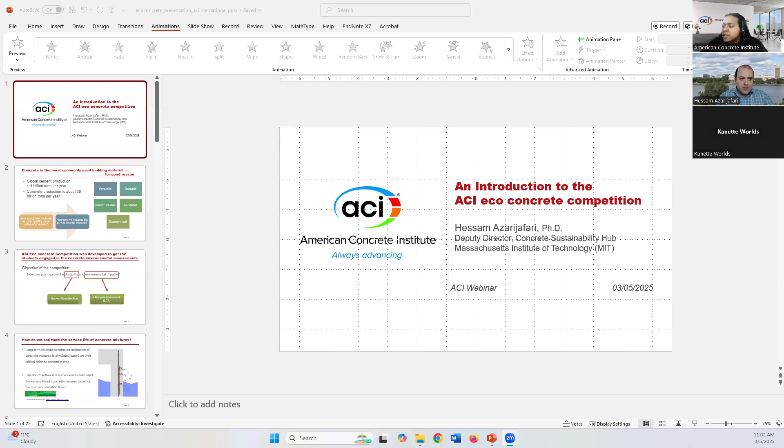All right. Hello, everyone. Thank you very much for joining this webinar. My name is Hessam Azarijafari, and I'm working as Deputy Director of the MIT Concrete Sustainability Hub. Today, I'm here to give you an introduction to the Eco Concrete competition and some of the changes compared to the previous version of the competition that was held in 2021.

To start this presentation, I would like to bring the importance of concrete and cement to your attention, which is the most commonly used building material for various reasons. As you can see on the screen, we're using more than 4 billion tons of cement per year, and obviously a much larger amount of concrete because cement is only one constituent of the concrete, so 30 billion tons of

concrete, and it's all because of the versatility, durability, constructability, and more importantly, concrete is a democratic material available everywhere around the world. So the availability and the economics of cement and concrete have enabled us to build a lot of durable infrastructure and buildings to satisfy the requirements for population growth and residents around the globe.

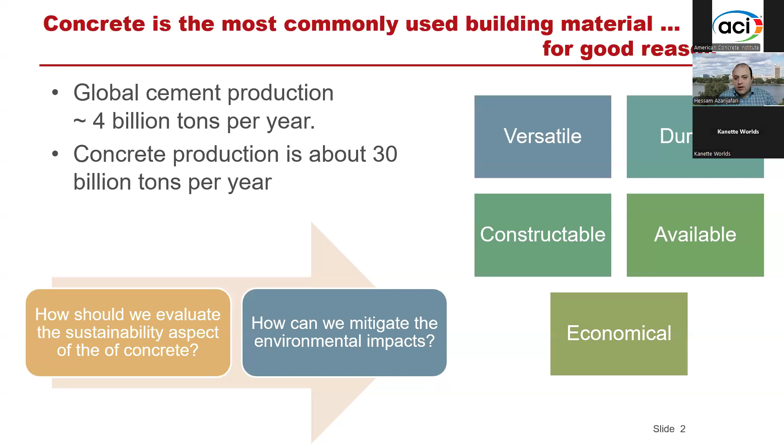So this huge amount of cement and concrete use should make us think how we can evaluate the sustainability aspects of concrete and what measures we can include in order to mitigate the environmental impacts of concrete. In this sense, we developed the ACI Eco Concrete competition in 2017 to get the new generation of civil engineers and students engaged in concrete environmental assessments.

So the objective of the Eco Concrete competition is how we can develop a concrete mixture that will improve the durability and environmental impacts of conventional concrete mixtures. For this purpose, we focus on durability and we translate the durability metrics into service life estimation.

And on the other side, for the environmental impacts, we conduct life cycle assessments in order to quantify the environmental impacts of the concrete mixtures, not only focusing on the climate change impact, but also other impact categories, for example, energy consumption or acidification, eutrophication, etc., to have a more holistic view of the concrete environmental impacts.

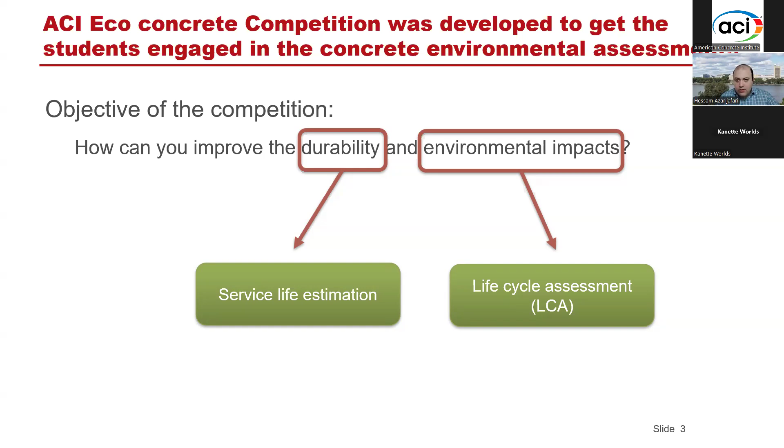So I'm going to start with the service life estimation and how we do that in the Eco Concrete competition. Here, our assumption is that the concrete elements we are going to design are exposed to an aggressive environment like the marine environment, and there are going to be chloride attacks that will lead to a risk of rebar corrosion. So we are targeting to assess the long-term chloride penetration resistance of the mixtures.

And to evaluate this, we use Life-365, which is a publicly available online tool that you can use to estimate the service life of the concrete mixture and understand when the corrosion will initiate.

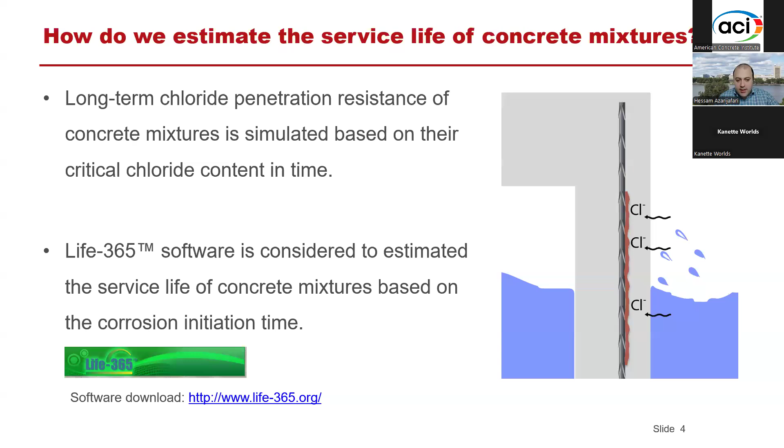For the environmental impact assessment, as I mentioned earlier, we are focusing on life cycle assessment, which is a quantitative method that will help us assess the potential environmental impacts. In this case, we are evaluating the environmental impacts of the concrete mixture, and we are focusing on how much emissions and resources are needed to extract the raw materials and produce the concrete mixtures.

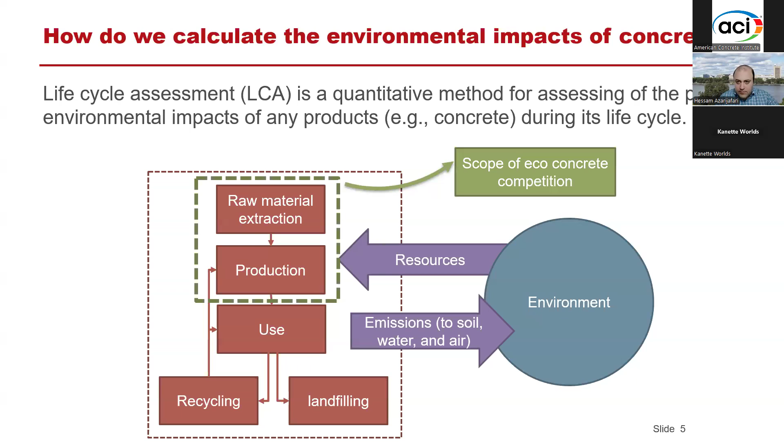What do we do for the Eco Concrete competition? You need to design two concrete mixtures. One is called the base case scenario, where you use straight Portland cement, meaning there are no SCMs or alternative materials in the mixture. Here I use the abbreviation BCS. On the other side, it is your task to develop an alternative case scenario, or ACS, where you replace the Portland cement partially with alternative materials and SCMs.

And then you will compare the environmental impacts of these two mixtures, as well as the service life, to understand how much benefits will occur if we shift from the base case scenario to alternative case scenario in terms of the service life extension and environmental impacts reduction.

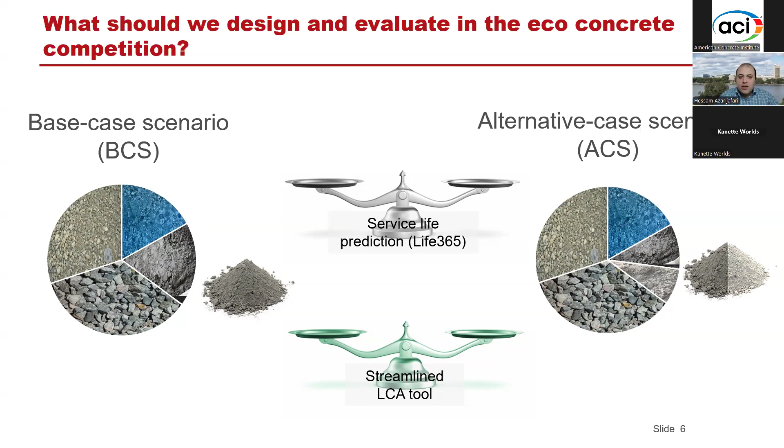But we have some boundaries and constraints when we are designing these two concrete mixtures. For the BCS, or base case scenario, your concrete mixture should at least incorporate 75% aggregates. So make sure that your aggregate mass is 75% of the total mass of the concrete. Your water to binder ratio must be fixed at 0.40 or 40%. And as I mentioned earlier, your binder should be 100% Portland cement.

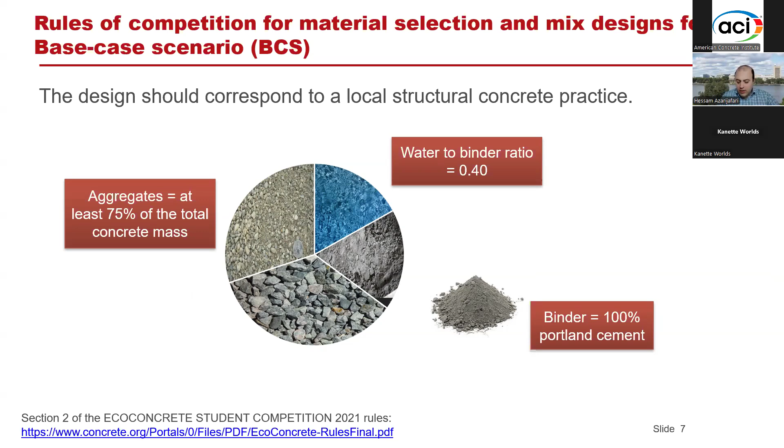On the other hand, for the alternative case scenario, you need to replace the Portland cement by supplementary cementitious materials. The supplementary cementitious materials that you can use are those that are already included in the Life 365 online tool, which includes slag, fly ash, and silica fume. The maximum amount of replacement by supplementary cementitious materials is 40%.

You can use multiple types of SCM, so making ternary or quaternary binder systems, meaning you can include 3 types of materials or 4 types of materials as binder if you get better results. So please use your judgment and creativity to use these different types of SCMs in order to get the most benefits in terms of the service life and environmental impacts.

Some other important notes is that your binder volume should be similar or exactly the same as what you have in the base case scenario. Your water to binder ratio, similar to the base case scenario, must be fixed at 0.40, and the aggregate volume and type shall be similar to what you have used for the base case scenario. Here are some of the notes and important points to consider when you are designing your concrete mixtures.

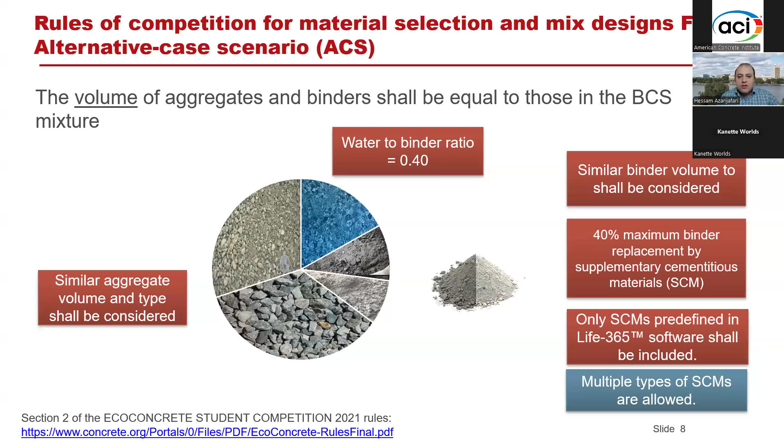But let's talk a little bit about the service life prediction and how can we use Life 365 to estimate the service life in these aggressive chloride ingress environments. So for that, you need to define both your base case scenario and alternative case scenario in Life 365. As I mentioned earlier, it used to be a software, but now it's an online tool that you can access for free. You can see the link on the bottom right corner of the screen. Feel free to log in and then use it in order to quantify the service life of your concrete.

So here, our assumption for the eco concrete competition is we are going to evaluate the service life of a slab. So you need to consider a slab for your analysis. The thickness of the slab is 20 centimeters, and the rebar depth is 5 centimeters or 50 millimeters. These are all parameters that must be fixed, and we evaluate that across all the teams to make sure that the assumptions are consistent. You also need to include your team name and team members as part of this first page, which is the project details page, as you can see on the screen.

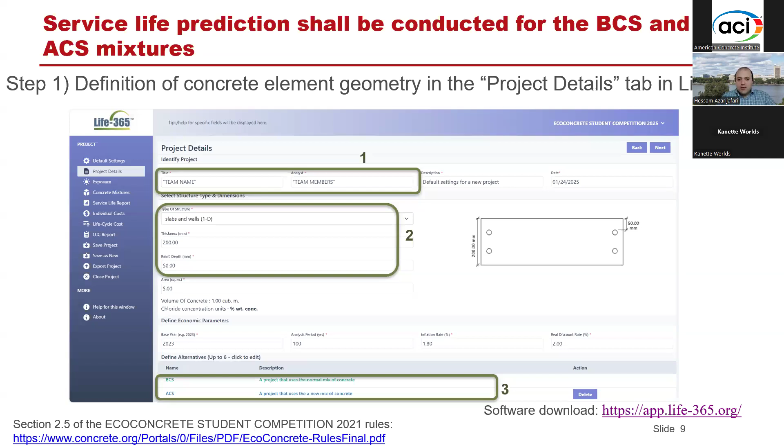The next step is to define the exposure condition. Under the exposure tab, you can see on the left of the screenshot, you should define a location in order to uniformly assess the chloride concentration and the chloride attack on your slab. For the purpose of this competition, we consider the state of Florida and the city of Tampa, and the exposure condition is defined as marine spray zone. Again, we must have all consistent assumptions. So all the teams must consider Florida, Tampa, and marine spray zone in this tab in order to have equal exposure condition for the concrete design.

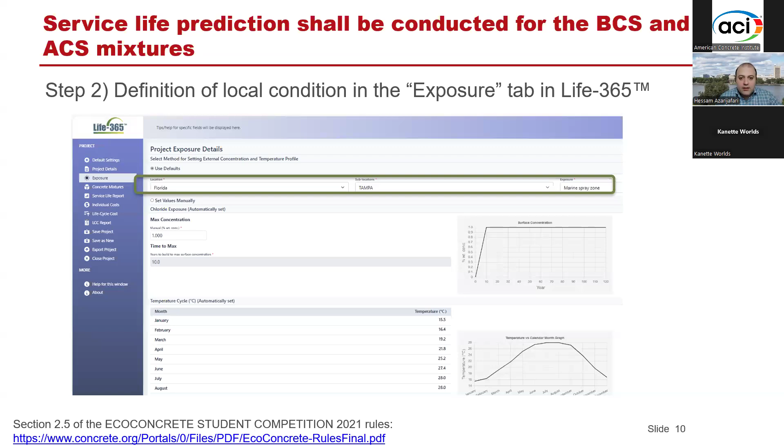After defining your exposure condition, you need to define your mix designs. So it's important that in the project detail tab that I mentioned earlier, you define 2 fields, BCS and ACS. By clicking on, for example, BCS, you can see that there is a box open in the middle of the screenshot. This is where you need to include some of the parameters relevant to the mix design, and the type of the rebar that you're using for this competition as well. So here you will define the water to cementitious materials ratio. For the base case scenario, obviously the values for fly ash, slag, and silica fume should be 0.

But for your alternative case scenario, these are some of the percentages that I would like to invite you to work on and optimize to get the most benefits in terms of the service life extension and environmental impacts. The rebar type should be black steel. So again, all the teams must select black steel for the rebar.

And for the rebar percentage, in terms of the concrete percentage volume, it should be set as 3%. In this competition, no inhibitors or barriers should be considered for your alternative case or the base case scenario. So both of them should be set as none, as you can see on the screen.

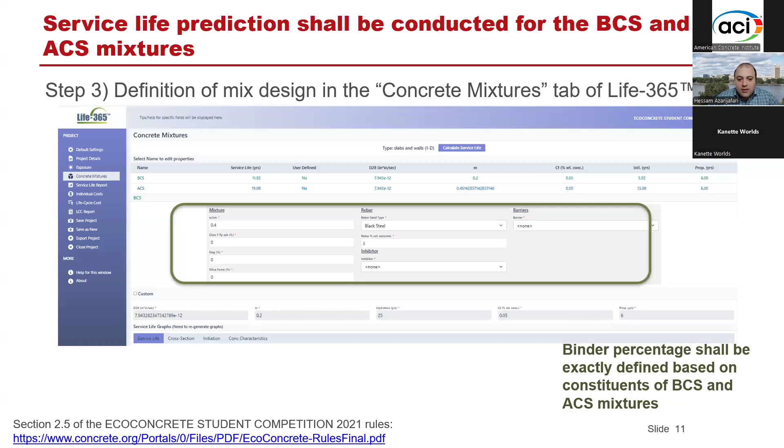And the last part, when you click on go, where you can see the results, we would like you to record your ACS, the alternative case scenario service life, and your base case scenario service life. And this fraction that you can see on the screen, the SS index ACS divided by SS index BCS, is the score that you need to include in your report.

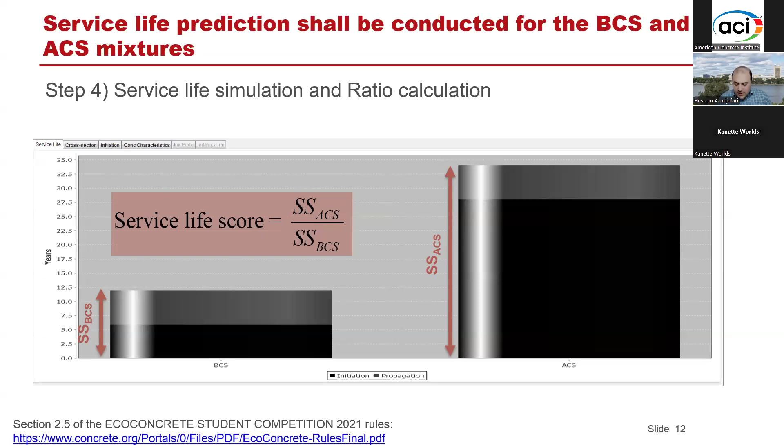And this is the value that you will use to rank the service life improvement among all the teams. In other words, this is one of the numbers that we and other judges use in order to determine among all other teams how well it performed. So this is all about the service life simulation and getting your results. Moving on to the environmental impacts.

On the ACI student competition, under the EcoConcrete competition webpage, you have access to an Excel tool, which is a streamlined LCA that will help you quantify the environmental impacts of your base case scenario and alternative case scenario mixtures. This is a relatively simple tool, but you need to pay attention to some of the details and make sure that you have cross-checked all the important points and get the green boxes for all the cells.

So once you open the Excel file on your computer, I would highly recommend using a personal computer with a Windows operating system. Sometimes some of my colleagues have difficulties using it with Mac or iOS. So it's safe to say that it's working effectively on Windows.

So first, you have to consider the inputs for concrete mix design. As you can see on the left, it includes the quantity of the materials, each constituent, for example, Portland cement, fine and coarse aggregate, water, and any potential admixtures that you will use here. And at the end, there is a summary tab, as you can see on the right part of the screen, where you can see if you got all green cells, meaning that you satisfied what was required in the rules. And the table at the bottom, plus the bars that you can see in the figure on the right, will show you the environmental impacts results.

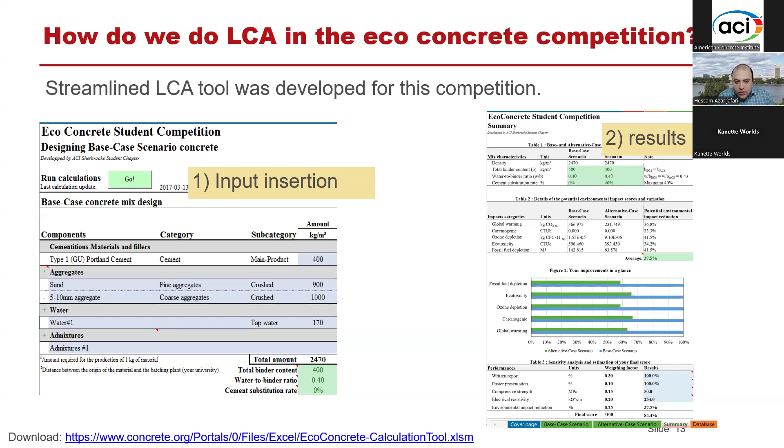So the value that I would like everyone to include in their report is the average improvement in 5 different impact categories, including global warming, carcinogenic, ozone depletion, ecotoxicity, and fossil fuel depletion, and to report it in your written report and also your video recording. But let's go step by step.

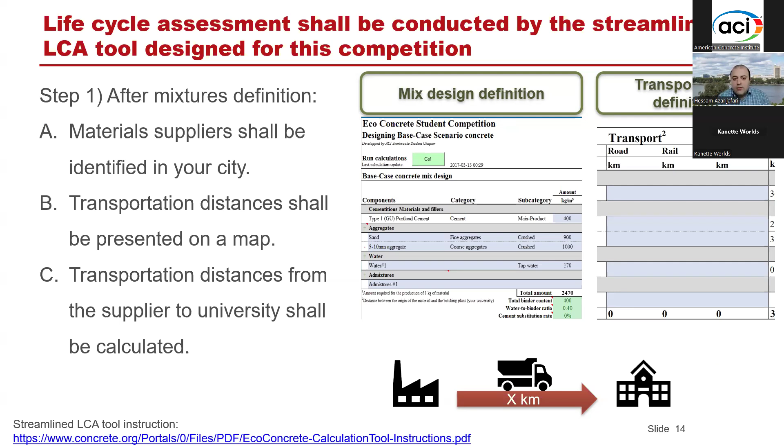So the first step to do the analysis, the life cycle assessment, is to insert the quantity of the materials. And as you can see on the right screenshot, you need to provide the transportation distance and mode, either road, rail, or waterway, in terms of kilometers for each mix design, both base case scenario and alternative case scenario.

For Portland cement and aggregates, the transportation distance must be estimated and included in the tool based on the closest plant or quarries, like aggregate quarries, to your university. So while you must use the given transportation distances for different types of SCMs, you still need to figure out where the cement plant is located in your region, and where the aggregates come from in your region as well.

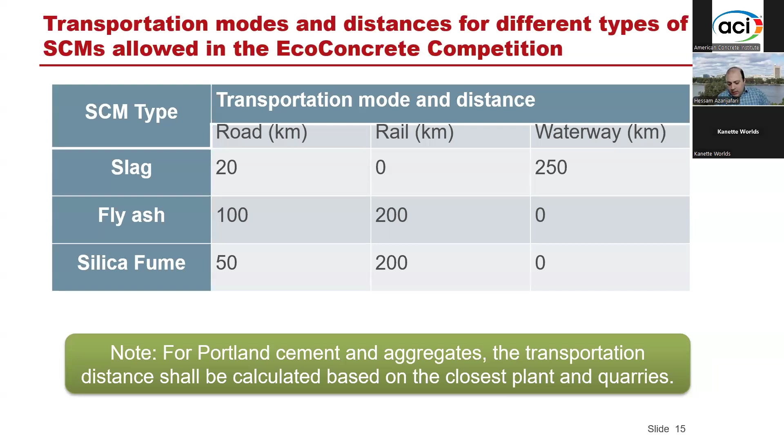And moving on to step 2, where you can check if all the parameters were inserted correctly. You can see that these are all green boxes, meaning that the binder quantity in the base case scenario and alternative case scenario is identical. So checked. The water to binder ratio for both base case scenario and alternative case scenario is equal. And then the maximum 40% SCM replacement is already satisfied as well.

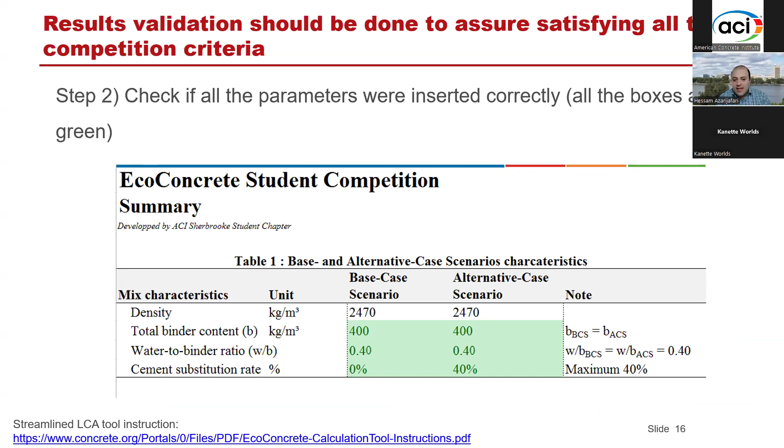And moving on to the last part where you can see the results, you can see, for example, in this case, on average, 37.5% environmental impacts was improved as a result of using the alternative case scenario instead of the base case scenario. And this is, again, the number that you need to report in your written document and your video as well.

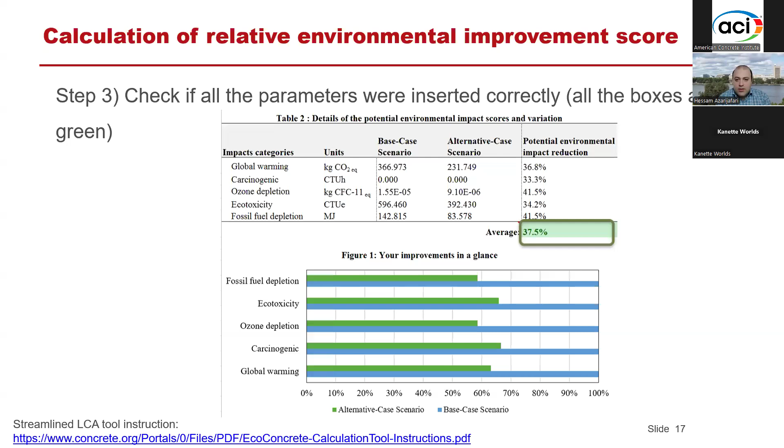So these are all about the evaluations that you need to do in terms of the service life estimation and environmental impacts calculation. And after finishing these and obtaining your optimized results, meaning the best combination of the environmental impacts and service life extension, you need to start drafting your report. And these are some of the notes that I have for the report.

So first of all, we need the reports to be submitted in PDF format. Please check the due dates from the competition webpage on the ACI website. The report should not exceed 20 pages, considering all the front page, table of content, etc. Please include the illustration of the maps and results. So we are interested in the figures and tables that you put in the report. And we would like to invite everyone to discuss the results and how can these be applied in large scale. I'll give you more information in the next slide.

And for your video recording, we would like to invite everyone to create a video in order to show and walk the juries and judges through the procedure that you have gone through, what is important for you from a regional aspect, and what do you think about the concrete mix design that you propose as alternative case scenario. We would like to also invite everyone to participate in the video creation. So if all the team members participate in the video and presentation, there's going to be a plus

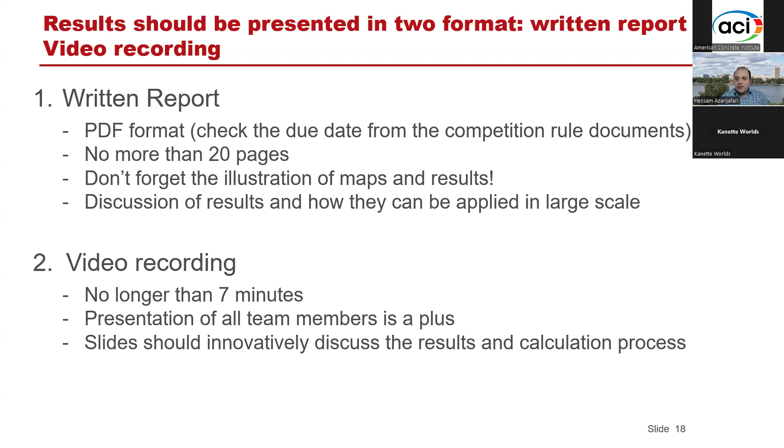for the competition. Make sure that you use your creativity when you are making the video to discuss the results and your calculation process, particularly how you optimize your concrete mixtures in order to consider the best results and the combination of the results for service life and environmental impacts. This is a very important part of your report and video that I would like everyone to pay special attention to, which is about the instructions and your insight on your alternative case scenario mixtures.

Please read section 2.6 and 2.7 of the rules document on the ACI website, but I would like to bring this to your attention about the scale-up effort and the constructability of the proposed concrete mixtures. First of all, we would like everyone to talk about the potential end-use applications of the alternative case scenario that you proposed. Is this mix design applicable to pavements, buildings, precast elements, etc.? Just identifying and knowing your opinions about how to prioritize the implementation of these alternative case scenario in your region.

Second, we would like to hear your thoughts on the constructability of this alternative case mixture, particularly the impacts on the project costs. For example, some of these SCM materials can significantly delay the setting time or early strength gain. So that will consequently affect the project timeline and might result in a delay in the project, which will incur some cost to the project, right? So we would like to hear your thoughts on how the new mix design affects the job site and the

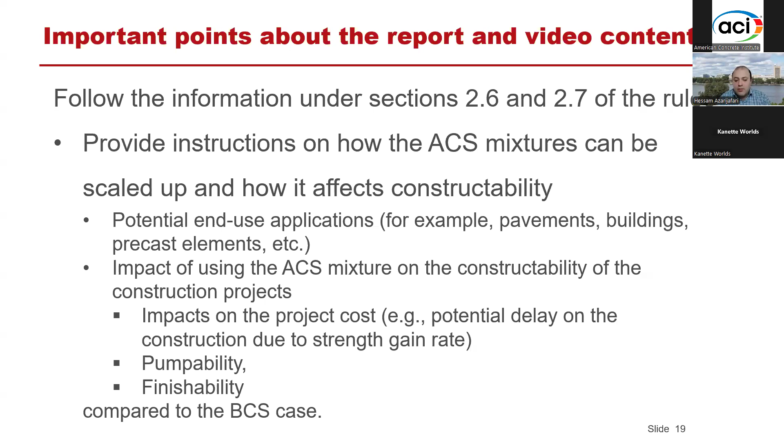project schedule. Also, we would like to hear your opinions about the pumpability and the finishability of this proposed concrete mixture. Do you think that any adjustment needs to happen at the construction site when we move from the base case scenario to alternative case scenario? And we want to make sure that we have a comparative analysis here. It doesn't need to be a fully quantified analysis, but at least having thoughts on those will give us more confidence about the scalability of the proposed concrete mixture in this competition.

Here is an overview of the score calculation. So your final score is a combination of your performance for report writing, presentation, durability or service life estimation, and life cycle assessment. And you can see the weighting for each, like half of your final score comes from the quality of your report and your presentation, and the other half is from the results that you will obtain and the optimization that you will do to minimize the environmental impacts while improving the service life.

What we need from you to submit is a PDF report, then a YouTube link of the recorded video. We have detailed instructions in the competition rule documents that you can follow to upload your video on YouTube and share the link with us. Then we would like to receive your filled-out Excel tool, meaning that we would like to see your calculations for the life cycle assessments and see the final scores in the Excel tool.

And lastly, we would like to have a version of your Life 365 results. The online tool allows us to generate a JSON format, and then when extracting that final result, please include it in your submission package and send it to us. We invite at least the top 20 teams for the online interview and final ranking for this competition.